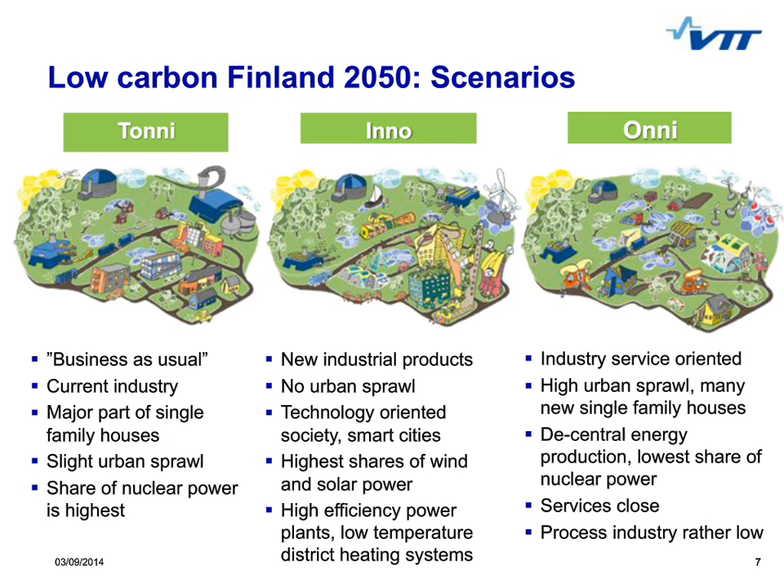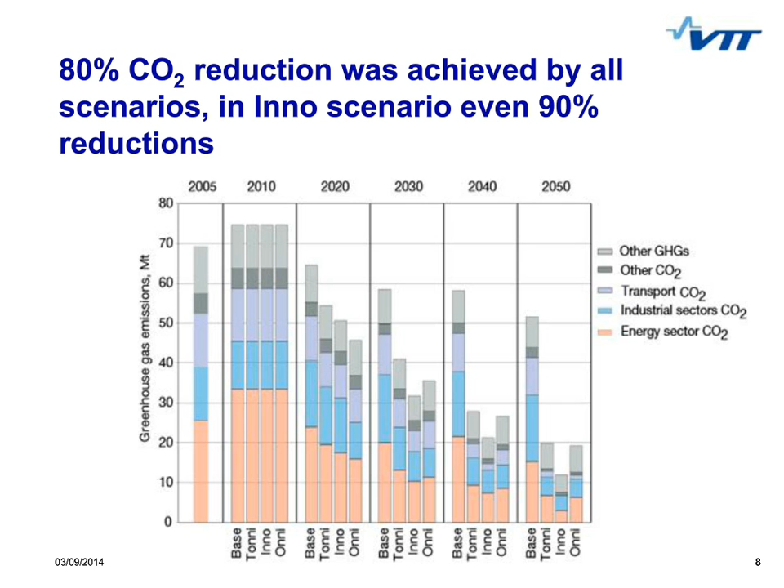Based on the calculations in these scenarios, we concluded that it is really possible to have those kind of high reductions in greenhouse gas emissions. And even in the Inno scenario, which was using the smart cities and smart energy technologies, it was possible to achieve 90% reductions in greenhouse gas emissions. What else we learned from those scenarios was that the highest reductions are done in energy and industrial sectors, and also that the share of the renewable energy is clearly increasing compared to our current level.

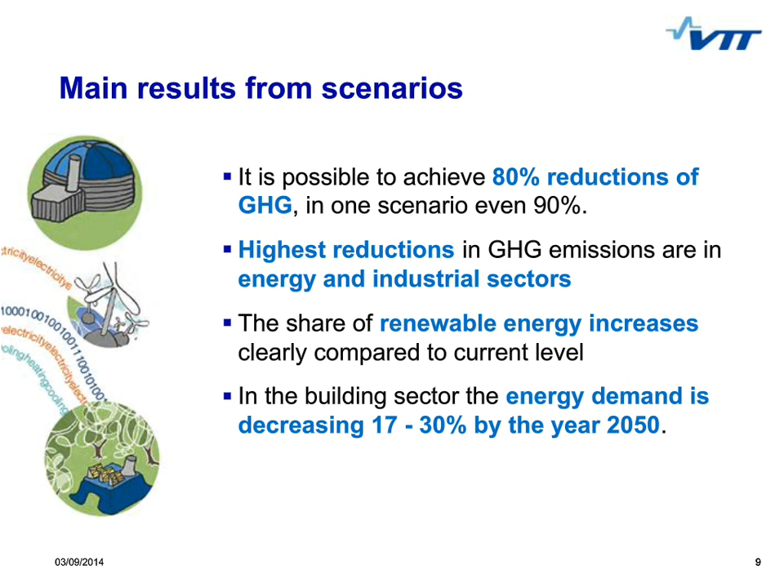In building sector, the energy demand is decreasing clearly by the year 2050. It was decreasing up to 30%. And when we see more closely the final energy consumption in the building sector, we can see that the electricity is dominating here. So it is higher compared to the heating energy, even in our cold climate. And this is due to electrical appliances and lighting in buildings.

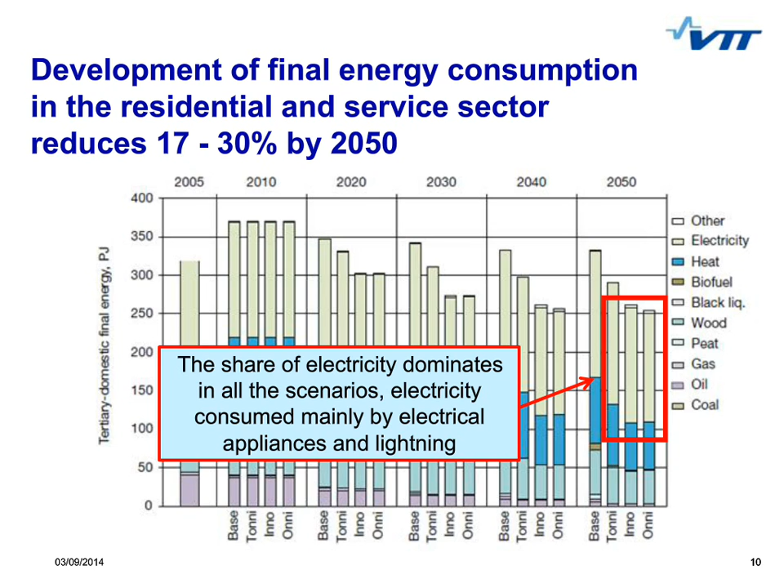So what we can conclude is that the low-carbon society calls for structural changes in the whole economy. This means that we need to implement new technologies, services, and business models, as well as we need to change our ways of living, working, and moving.

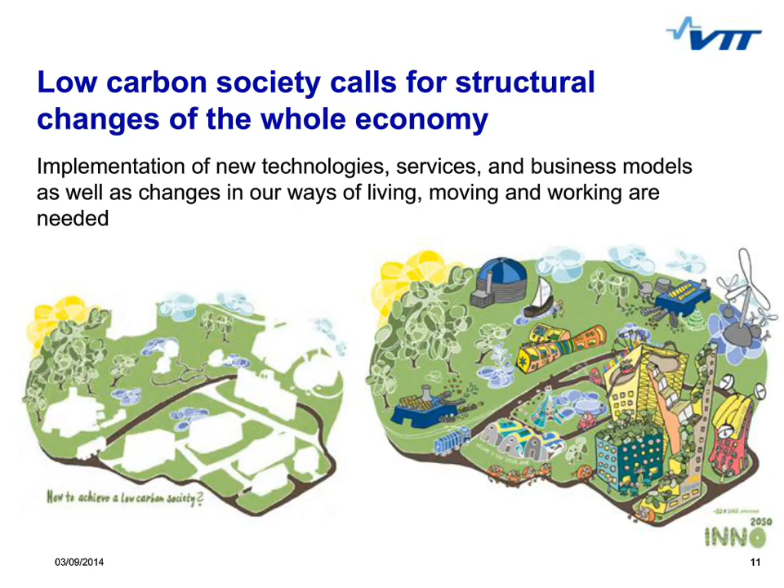And also, our future energy networks are changing. We need to combine our central and decentralized energy production. We need new type of energy network management, and we need to combine energy storages and smart energy networks. My colleague, Dr. Kari Mäki, is giving you more insight on these topics.

Okay, so thank you, Mimo. And I hope everyone is still online as we go towards smart grids now. And I will give you some idea about what smart grid means actually, why we need something like smart grids, and then go to some specific aspects, and also tell you what VTT is doing for these things.

So our definition of intelligent energy grid is based on the fact that this is an energy system that uses information and communication technologies throughout the system, so that we gather information and we act on it, which means we are monitoring, we are controlling the system on all levels. And we see this to cover electricity, heat, gas, and we see a very central role for the ICT in this sense. And my presentation today will focus more on the electricity side, so-called smart grid.

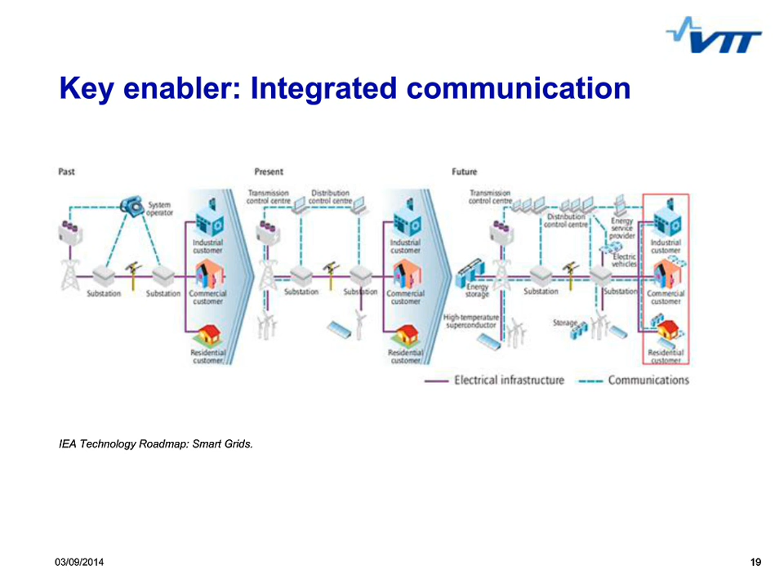And then something about storages. Actually, a good storage unit is something that we would really need to make a good system in the future. This is more or less the holy grail for building a good system.

And if we want to put the storages on the scale where we compare storage capacity with the time scale, we can map different technologies, different application areas, and here we have some example of that.

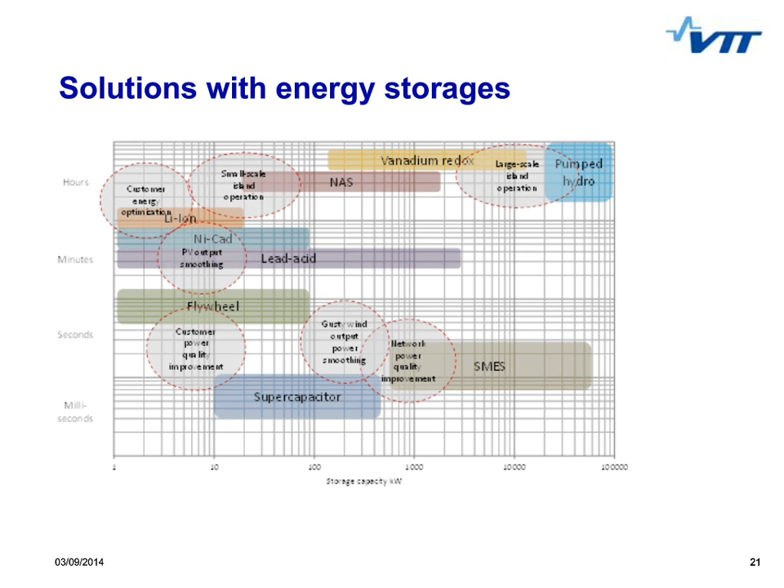Okay, but then I will come to the topic of what VTT is doing for these topics I presented in the previous slide, and there are some kind of alignments from our side. We are clearly looking at some joint research platforms currently, so that we are wishing to integrate, for instance, power system and communication simulations in the same picture, and this is a very important platform for the future. We also have some techniques for smart meter data processing, like data mining type technologies.

We are very much looking at the user level applications there. We are also doing a lot with the electric mobility and storage integration. And then, for instance, for new facilities or research infrastructures, we are looking for standard interfaces such as IEC 61850. And then I have here some examples of that.

So first of all, we have been integrating power and communication worlds, so to say, in terms of putting our simulation tools together. And here's one example where we have a microgrid simulation. This picture shows a very simple microgrid type network. But the key point here is that we are bringing some measurements from the model,

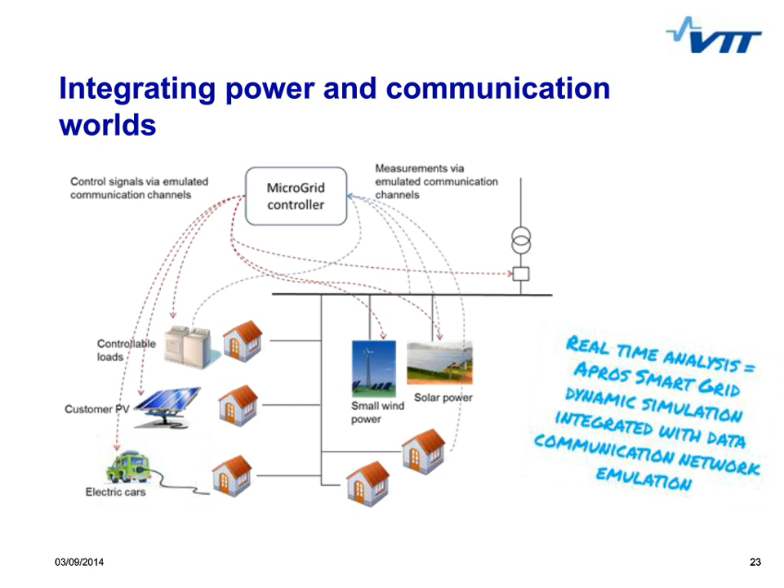And then we can access things like communication times, latencies, communication errors, and so on. And this is something we have been working on, and this is based on our Apros simulation platform, which is used for modeling the power system here.

And the picture on this slide shows a simple version of the system we are running. So there is like a control loop and a measurement loop, and both are taken through a communication simulation. And then we have some intelligence we want to test, and we have realistic system models for doing that.

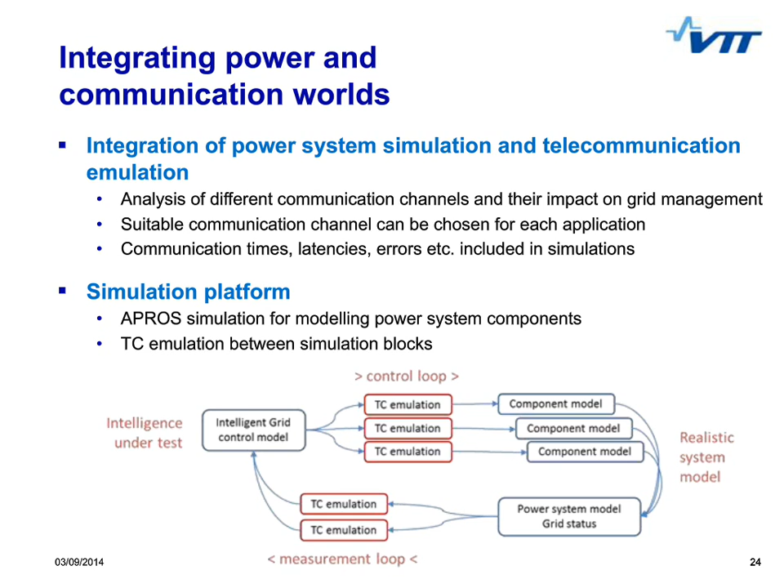Another thing we are doing is we are developing and applying some mathematical methods for data processing and data mining on the side of smart meter data. And with this approach, we can end up in some new kind of customer profiles, or find some interesting behavior among customers. And this will also support better management of the smart grid system.

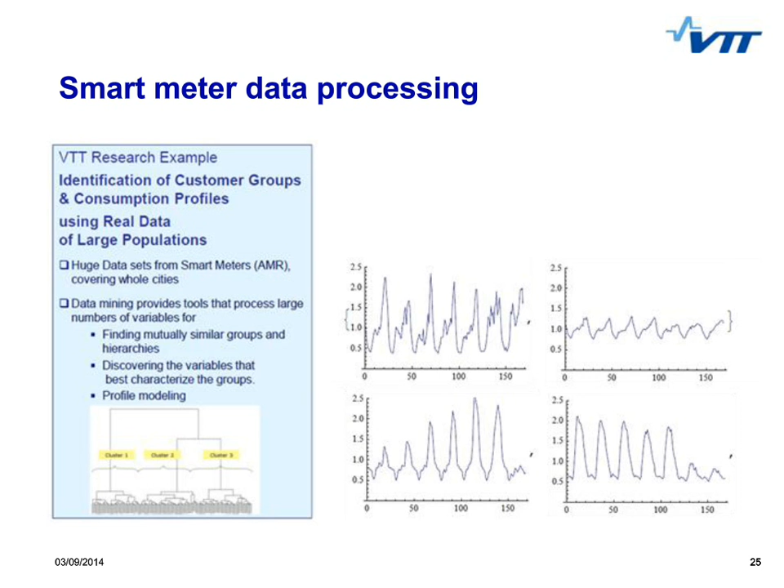Another thing we are working on quite a lot at the moment is demand response, aggregation of different loads, aggregation of different small generation units. And this is utilizing active components like storage, load, electric vehicles, and so on. And of course, there are different solutions, different business models, and these can serve market customers, also network,

depending on the circumstances. And in this sense, it's very important to understand the local circumstances, like regulation or market structures and so on. So the business models are, of course, different depending on the circumstances.

Another example of some interesting things we have been working with is applying DC power in urban areas for city distribution of electricity. And also here we have some different concepts for applying this, regarding where we are using the DC and what is the customer interface and to what kind of level we are bringing the DC actually.

And when we are considering some urban areas or smart city grids, this is one option, but it depends on the case actually.

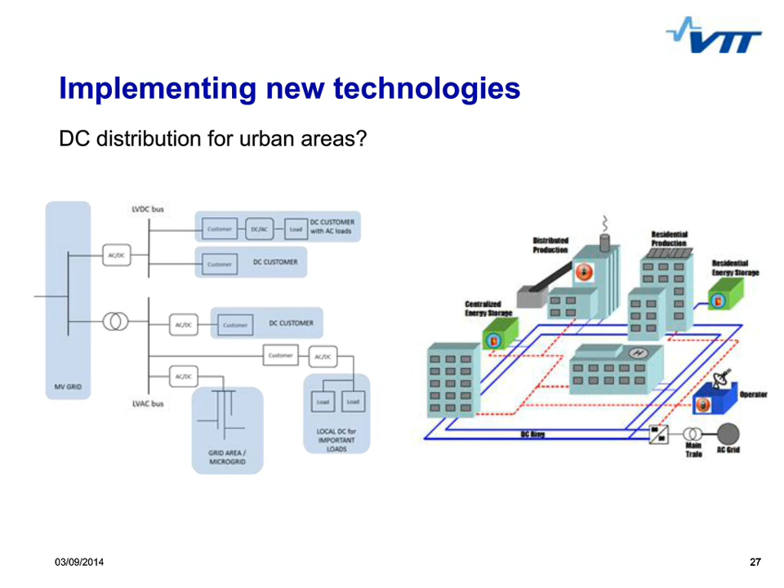I also wanted to highlight our new microgrid test site, which we have developed, and this is focusing on user interfaces, user level applications, and some local energy management issues, for instance. And I think it has quite typical features like small wind power, PV panels, some storage units. Also EV with controllable charging ports.

But then we have a very interesting system where we can control the domestic loads. And in this environment, we are developing some local management things and also user interfaces like iPad type interfaces. Okay.

So to put together what was on the previous slide, I think we are continuously going towards an integrated and more holistic approach where we need to integrate the studies across different levels of the power network or electricity network, but we also need to integrate with different energy sectors, like putting together heat and electricity, and we are continuously working on that.

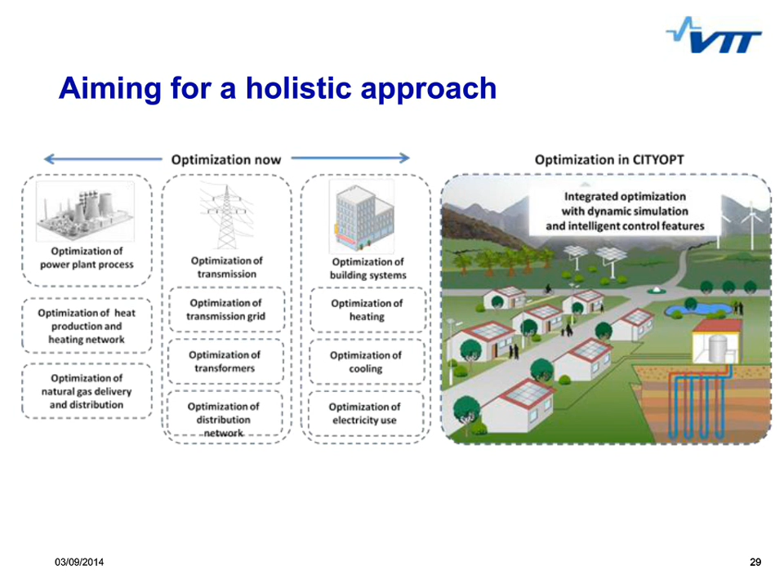Thank you, Kari. Ladies and gentlemen, colleagues. My part in this session is focusing on district energy systems in which individual buildings, their end users, are actually in the very core. Another angle in my presentation is to emphasize the importance and opportunities of information and communication technology, sensors and automation technology included, as an enabler for energy services to manage increasingly complex energy systems with the final goal to fulfill end users' needs and satisfactions.

First, I will briefly discuss the evolution that has been and what is going on regarding the development of buildings as systems and their energy use. Secondly, I will emphasize the opportunity of dynamic simulation of district energy systems in the planning phase to guarantee and verify the performance of such systems. And then a few words on benefits for various stakeholders using dynamic simulation as a tool in their decision-making process.

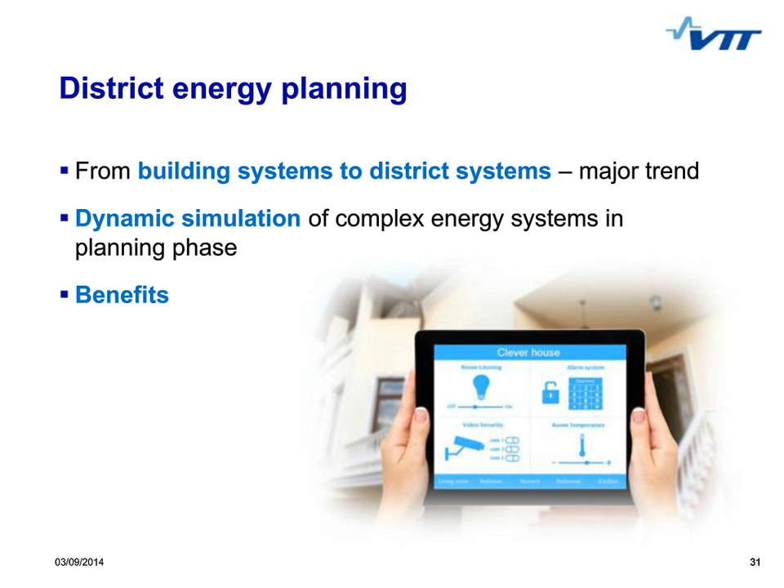In the near future, all new buildings should be near zero energy buildings. This means that buildings not only consume energy, but they also produce energy with renewable energy sources nearly the same amount that they consume. The challenge is the mismatch between energy and power demand and renewable energy production on building level. Therefore, the energy system needs to be looked at in a larger scope. All this development reflects to existing building stock sooner or later. On the other hand, radically new business opportunities for energy and power balancing will arise.

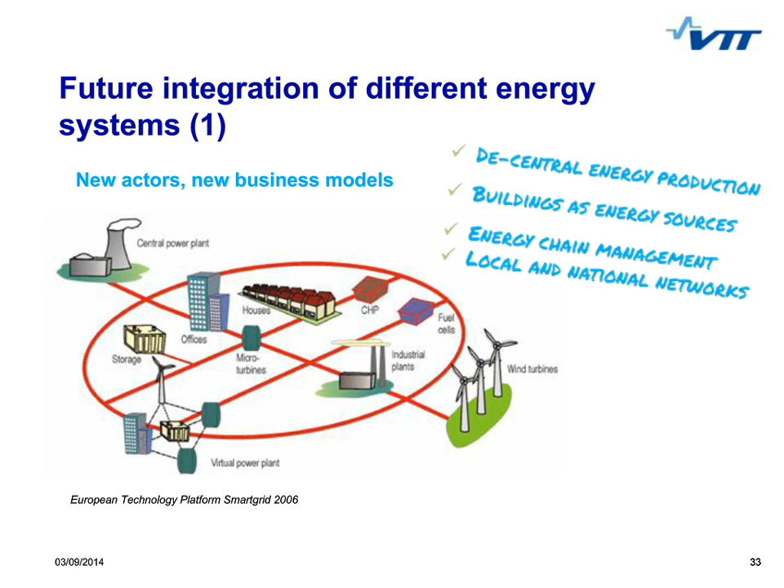Looking at the energy system on building level and district level, we are not talking about only electricity and heating. Also cooling demand is expected to increase even in Nordic climate. So from prosumers' perspective, we can expect that buildings will both consume and produce electricity, heating and cooling energy and power. Therefore, open two-way networks for all these purposes, electricity, heat and cool supply, are foreseen.

In case of heating and cooling in Europe, heating is typically needed during winter season and cooling during summer season. That's why there is an energy efficient opportunity to connect and integrate district heating and district cooling systems to serve both functions. The so-called low-ex principle, low temperature heating, high temperature cooling, water-based system as heat carrier, serves well for that kind of purposes.

On the other hand, a local district energy solution is always case-specific, depending on multiple factors such as energy and power demand, local renewable energy sources, local waste and surplus energy sources, business models, and therefore backup to large-scale energy infrastructure may be needed.

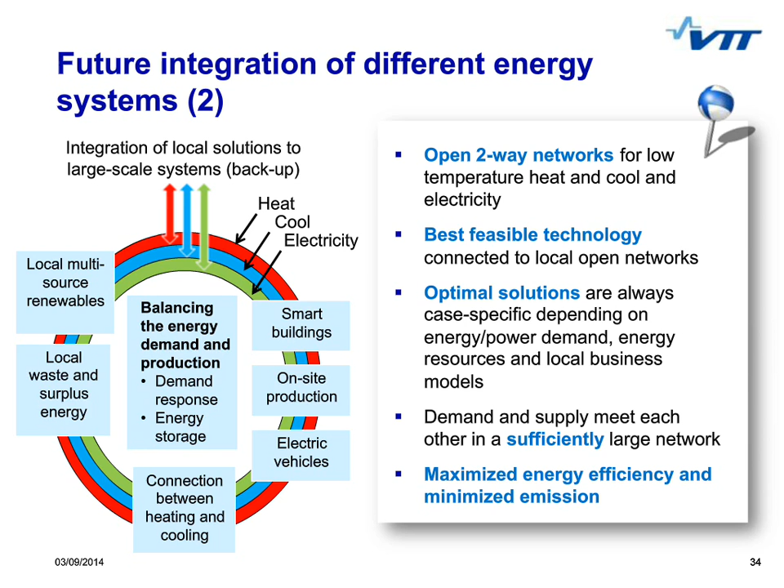This is not actually rocket science. A sustainable district and economic efficiency can be reached by integrated system optimization using existing technologies, likely. However, collaboration and co-creation between different business disciplines and stakeholders must be there.

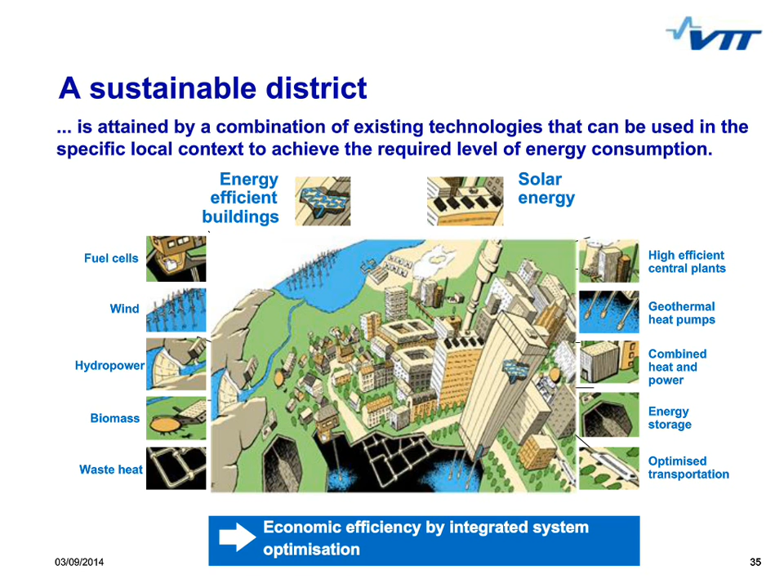Now I move to dynamic simulation of complex energy systems. VTT has developed multifunctional software for modeling and dynamic simulation of complex technical processes. Originally, the software was developed for nuclear power plant analysis. Now it covers energy systems more widely, including buildings with their technical systems on one side, and various energy production technologies on other sides, and technologies there between.

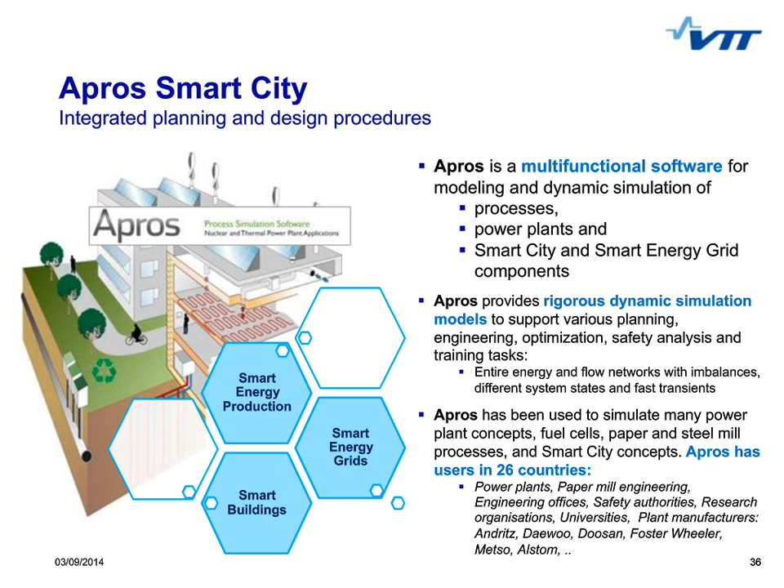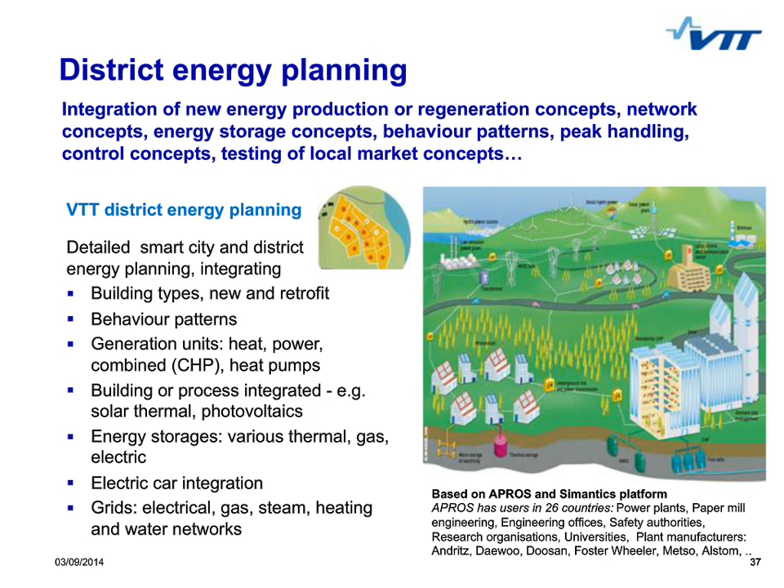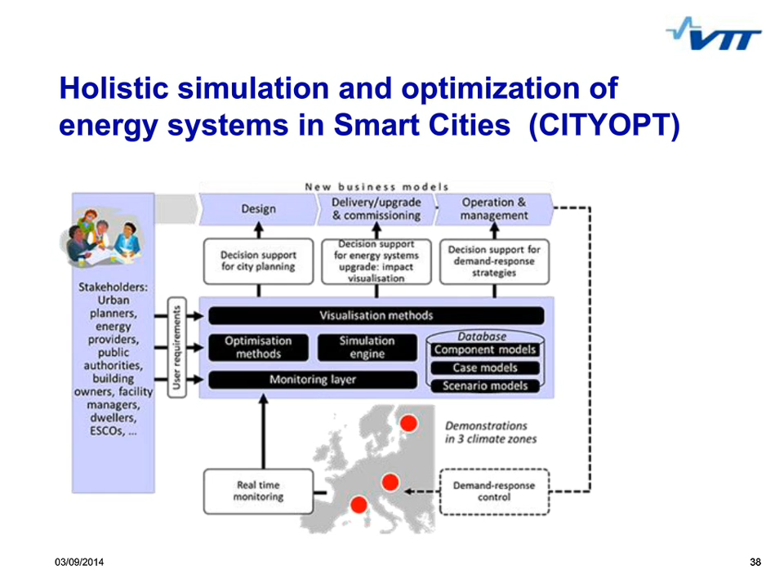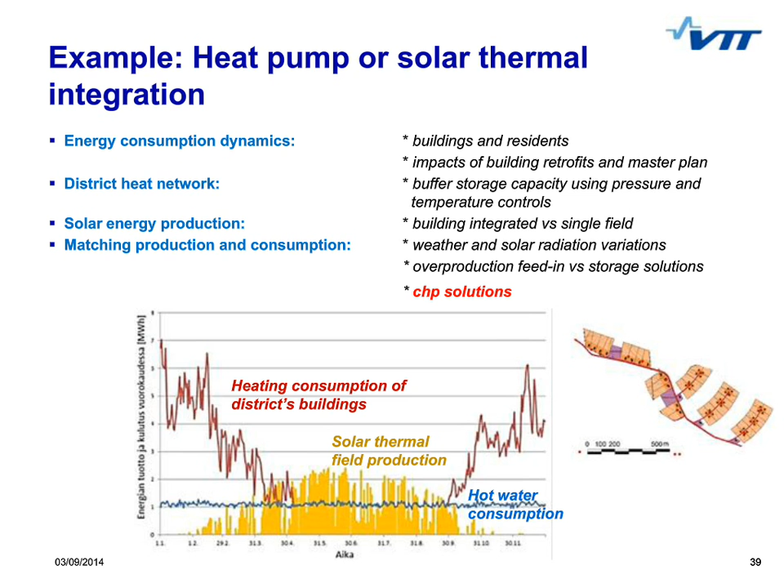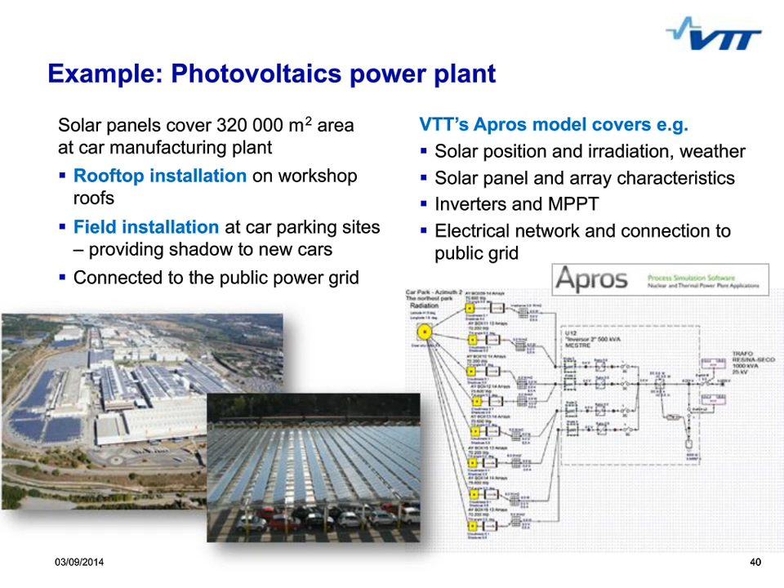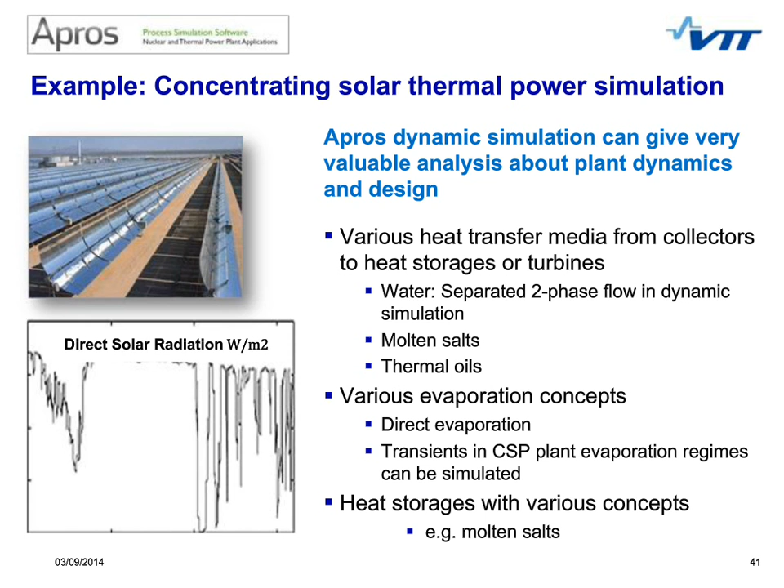Then the last part in my presentation is to look at opportunities for ICT-enabled energy services through some examples. Kari already introduced some examples of using measured data for producing useful information for the management of energy systems. Just to mention, using smart energy metering data to produce information of user profiles. Our world is becoming instrumented and interconnected. ICT is an enabler for intelligent energy management services.

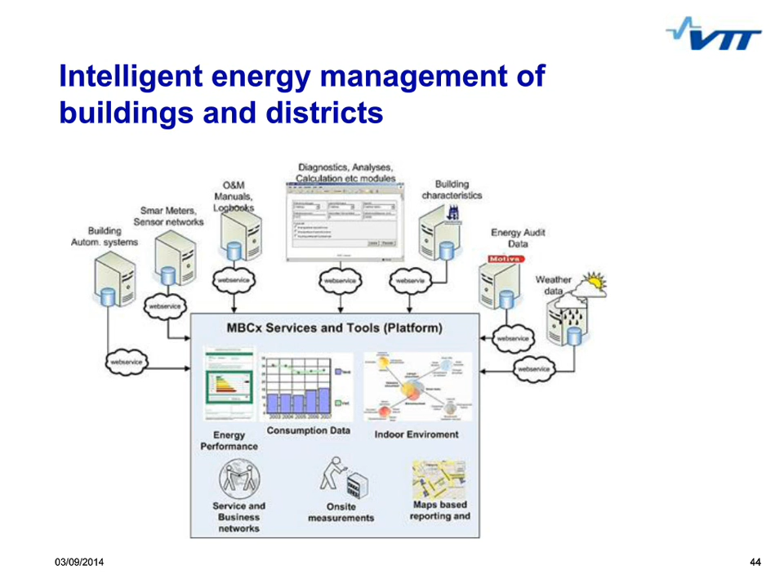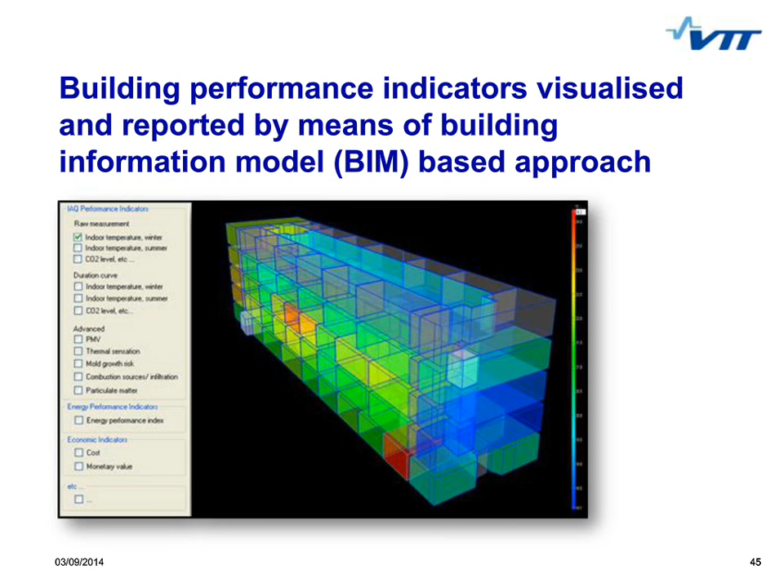Coming back to basics. Buildings together with their users have been and will be an increasingly active and dynamic part of the future energy system. Demand of users must be fulfilled. Building information modeling together with real-time instrumentation and visualization is an opportunity to provide improved services for the management of building operations and user-driven performances. For example, with different colors, it can very easily be illustrated how indoor targets have been reached.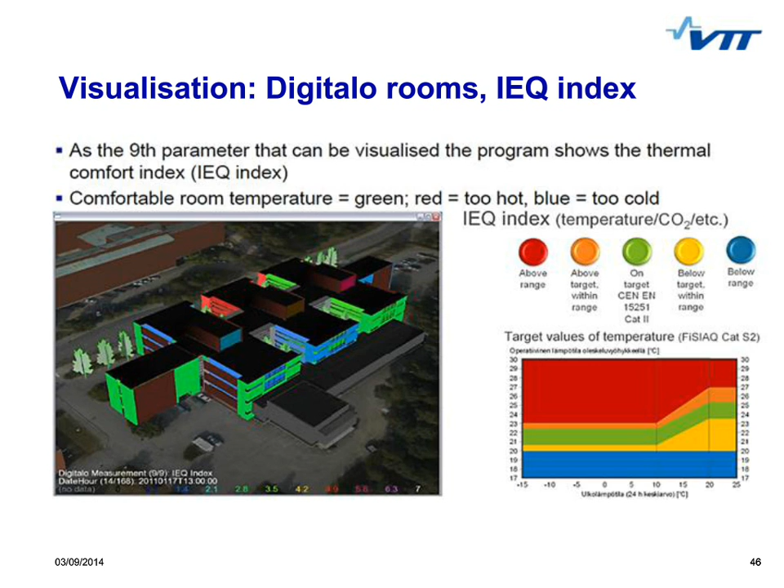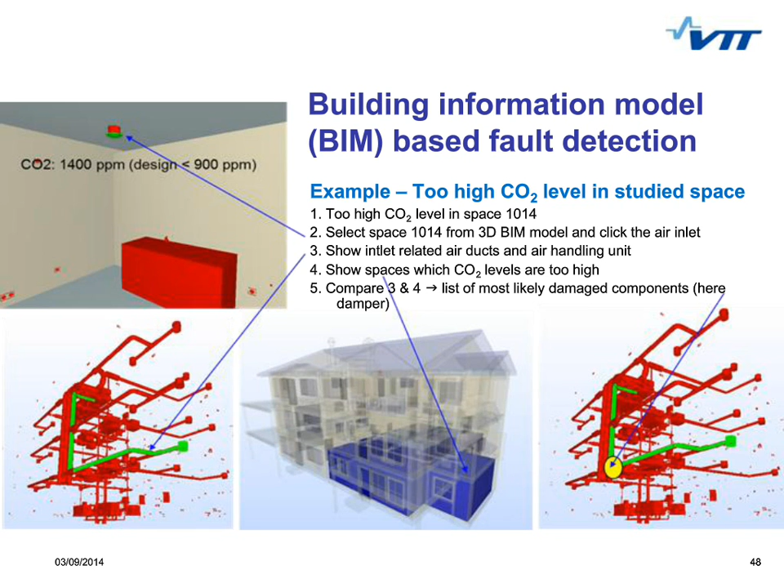The same building performance view can be obtained also on district level. In case of performance problems, faults can rapidly be detected and their location visualized. These were just a few examples of applying building information modeling. Coming even more back to basics, it's important to forecast people's mobility. In other words, the proper indoor environment conditions should be provided where people are in a specific period of time.

And here is an example where data from instrumentation in combination with mathematical modeling of human behavior could be an enabler in matching the demand and production of power and energy more efficiently.

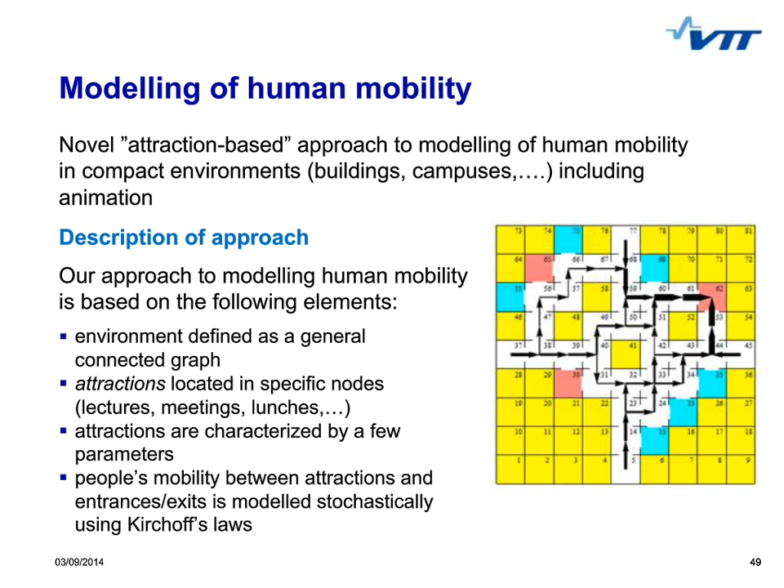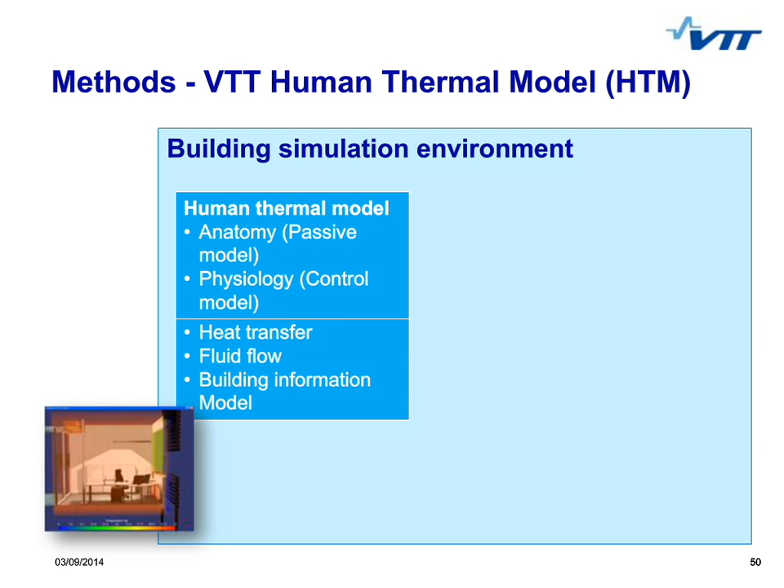Then going to very basics. Academic break now. Human sensation inside buildings is the most important thing when the approach is user-driven, as it should be. Regarding thermal comfort, which is relating to heating and cooling of buildings, totally new knowledge has been gained by VTT for understanding human sensation and surrounding indoor environment.

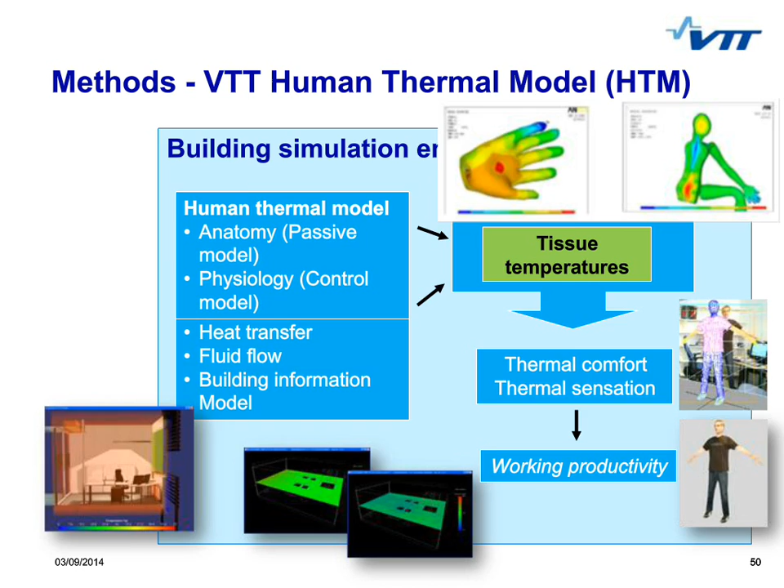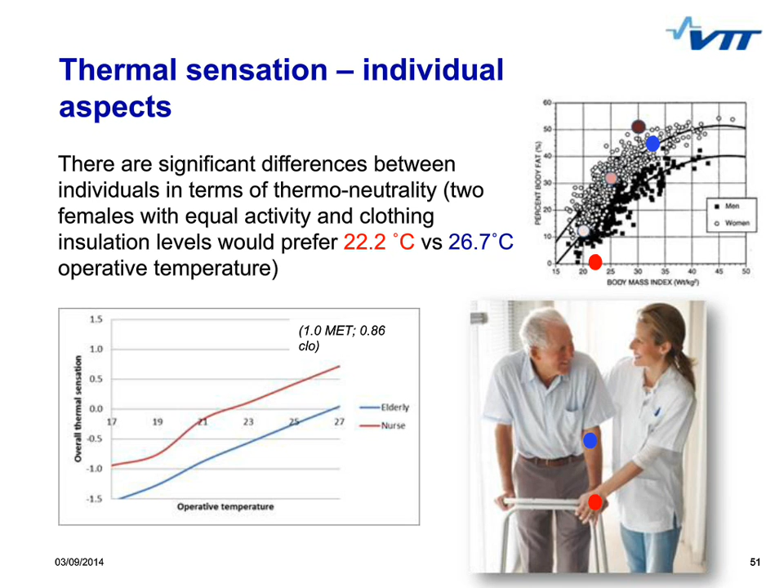Now we can understand better than before individual aspects influencing the individual human thermal sensation. This new knowledge will change, when the time comes, radically the principles of building systems design and system controls. Together with the fundamental knowledge of human thermal sensation, new designs, building systems and sensor networks, demand-controlled heating and cooling will be enabled, which in turn again will support the goal of optimal power and energy balancing between demand and production.

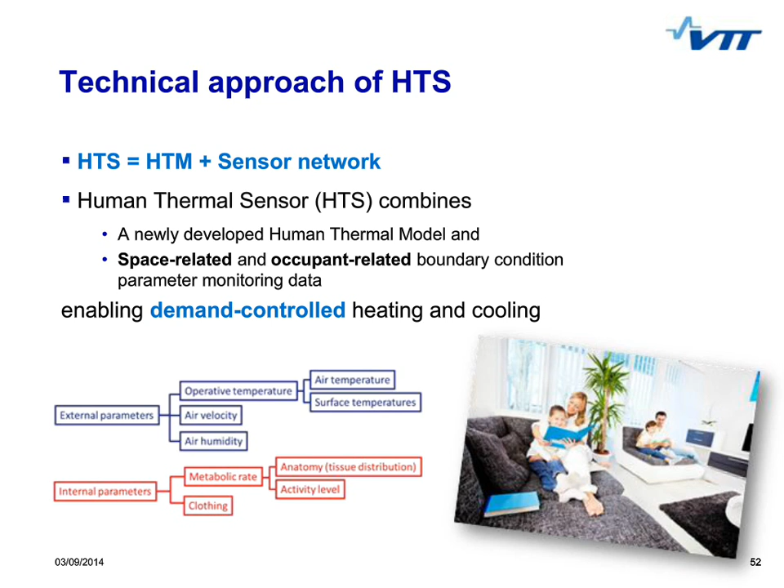I will now conclude and summarize our presentations. The energy system is becoming more complex and dynamic than ever before, which makes new business opportunities and roles arise. Increased use of renewable energy sources will reduce environmental impacts, but also challenge the optimization of the systems. Matching energy production and demand in a secure and cost-effective way has to be assured. Totally new energy concepts and systems can be used for this.

Intelligent interoperability and interactive user-oriented control of systems for energy balancing and energy storage is a prerequisite. ICT, together with smart sensors, smart metering technologies, and efficient communication, will enable integrated, trustworthy, and reliable smart energy systems. But we think at VTT we can offer to serve this paradigm shift process; we can help in holistic understanding of energy systems and their interdependencies.

We can support development of concepts for sustainable districts. We have competence in simulation of complex energy systems, integrating various technologies on different system levels. We can support the development of solutions for applying new communication technologies for smart energy systems, and also provide technologies for managing and processing big energy data masses, and also have solutions for finding the essential from data available.